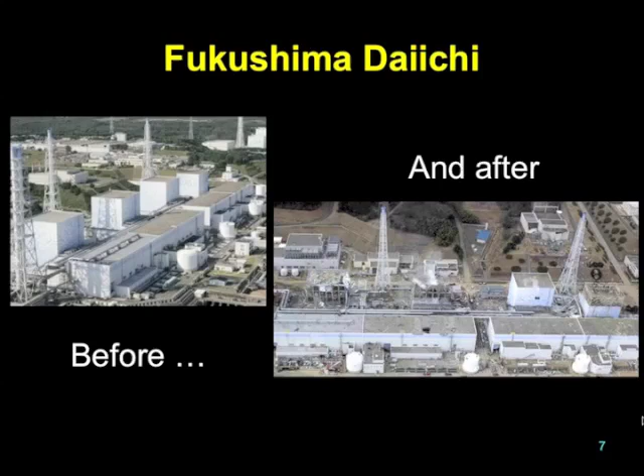Okay, Fukushima on March 11th, 2011 was a 6-reactor nuclear power plant. 3 of the reactors, units 1, 2, and 3, were operating. Units 4, 5, and 6 were shut down for scheduled refueling and maintenance outages on that day. The picture on the left shows the plant site before the accident. The picture on the right shows the plant after most of the damage had been done.

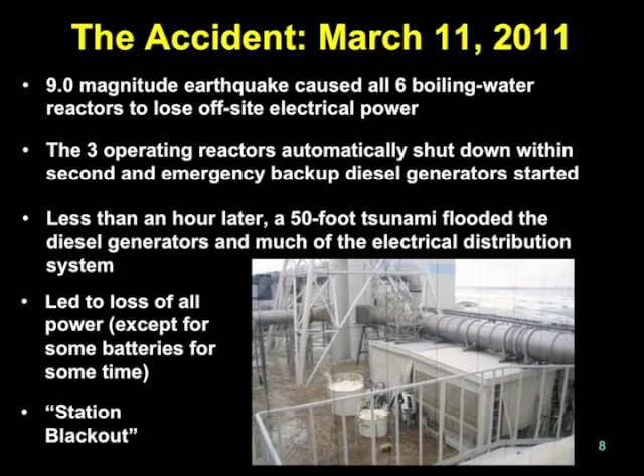That condition where all alternating current power was lost and the only thing you had was direct current power from batteries is what's called a station blackout. It had been known for decades that station blackouts are very likely to lead to core damage, and this event followed that script pretty well.

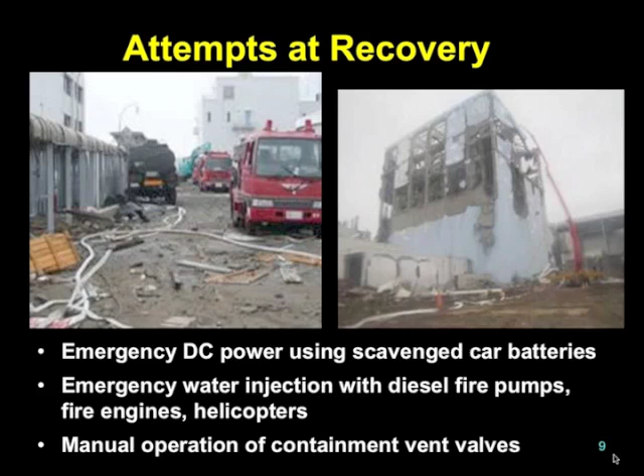The benefit, although that's not why they blew up the buildings, but the benefit of that happening is it provided pathways that helicopters and fire trucks from below were able to use to get water into the spent fuel pools. So as bad as Fukushima was with 3 damaged reactor cores, the openings that resulted from that allowed workers to minimize the damage and prevent the spent fuel in those pools from becoming overheated and adding to the problems that the site faced.

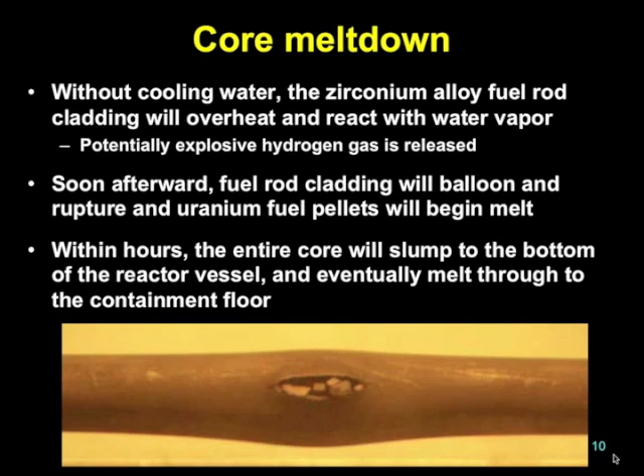The cladding started breaking. Here, at the bottom of the picture, you see what's called a fish mouth crack in a metal fuel rod, and you kind of see the fuel pellets inside. It got much worse at Fukushima. It actually overheated and melted. It became more like lava than fish mouth cracks. And the exact location of those reactor cores is known in general, but not specifically, because workers hadn't been able to get inside the containment buildings to figure out where they wandered off to.

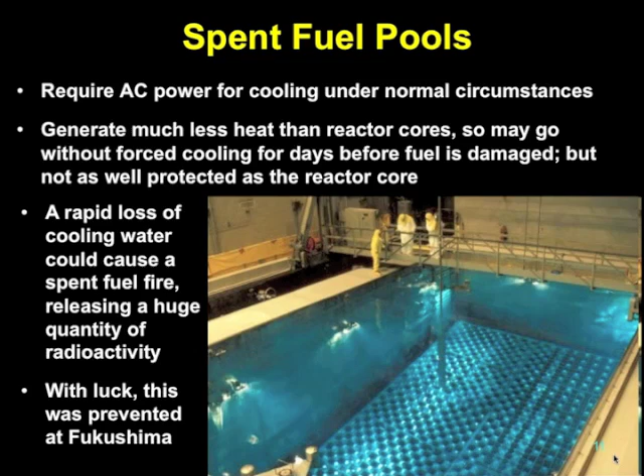So with the end, or the end of the beginning, I guess, because it's going to take quite a while to clean up the mess, they lost 3 reactor cores, melted down. Units 1, 2, and 3 that were operating at the time, they weren't able to adequately cool, and all 3 overheated and melted down. There were 2 spent fuel pools, Unit 3 and Unit 4, that were of primary concern. They were able to prevent significant fuel damage in those pools.

3 hydrogen explosions damaged the Unit 1, Unit 3, and Unit 4 reactor buildings. There was no fuel at all in the Unit 4 reactor core, but Unit 3 and Unit 4 shared a common exhaust line, and it's theorized that hydrogen gas from the damaged Unit 3 core went through that shared line into the Unit 4 reactor building and exploded.

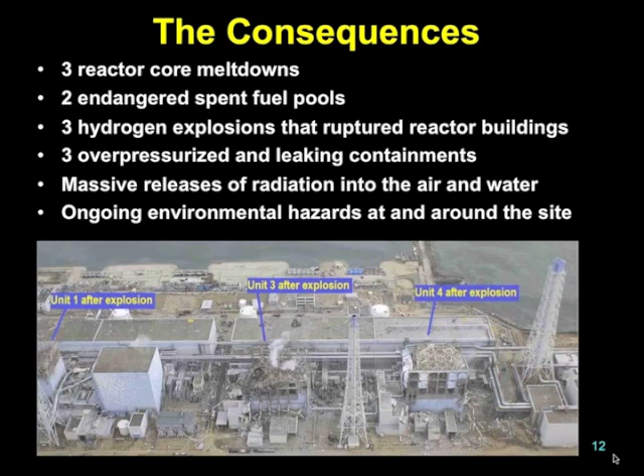The 3 reactor cores released quite a bit of radioactivity, and much of that got into the air and water, which prompted the evacuation and leads to tens of thousands of people today, more than 3 years later, that still can't go home because of the contamination. And it basically left a footprint that's going to take decades and billions of dollars to undo the damage from our cleanup.

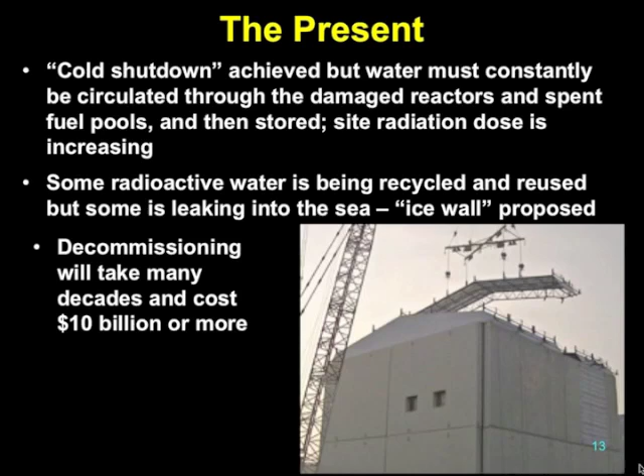In the longer term, meaning over the next few years, they have an ambitious plan to try to freeze the soil around the site and create what's called an ice wall, but that itself has some technical challenges, and it's not clear it's going to work. Decommissioning of the site itself is going to cost more than $10 billion as a current estimate, but that's only a fraction of the total liability that TEPCO is facing.

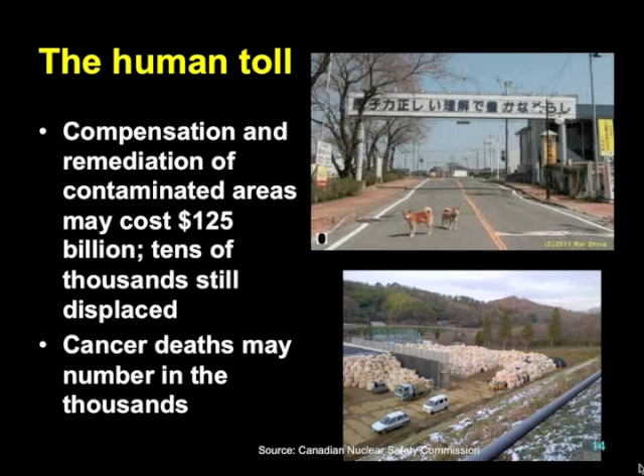Most of the radioactive exposure is probably still in the future. That's going to be people who return to areas where there's more radiation than there used to be, but at levels which the government says are safe. But that is going to have a health toll, and it's going to cause thousands of cancer deaths in the future. We still have the opportunity to prevent some of those, but the way things are going, it doesn't look like it's going to happen.

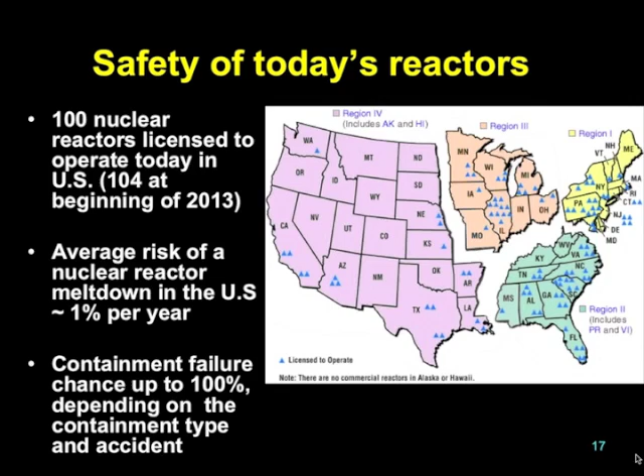And so we do have 100 nuclear reactors still operating in the United States. If you just look at the industry's own numbers, the risk of a Fukushima-type meltdown is about 1% per year, that something like that will happen somewhere in the United States, and the containment could fail depending on the type of plant. If it's an ice condenser and a station blackout, that could be up to 100% chance of failure. So that meltdown would result in a radioactive release with near certainty. Next slide, please.

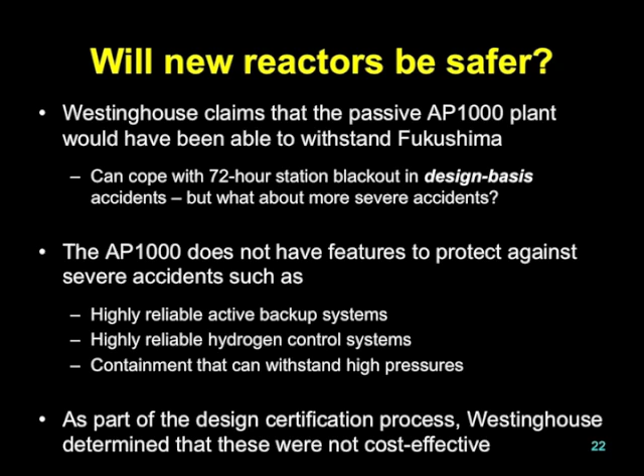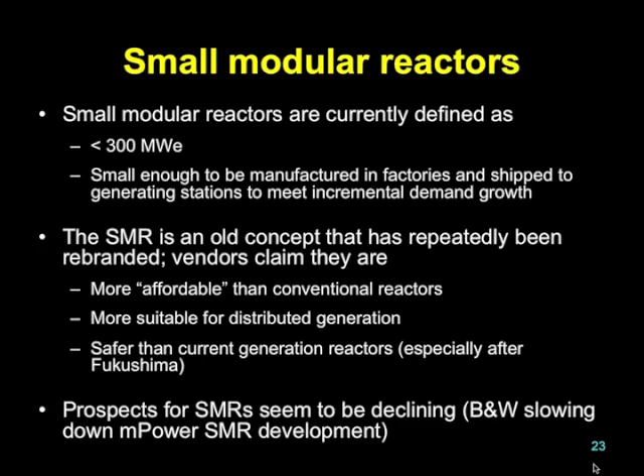I came to this project as the storyteller. I'm a journalist, as you were told, and I saw this as a technological disaster, but one with a very human face. And I think we're seeing more and more of the human side of what the long-term consequences are. About 40% of all Americans live within 50 miles of a nuclear plant. That amounts to about 120 million people. That fact alone should answer the question, why should we care about nuclear safety?

Nuclear safety has long been debated in hypothetical terms, but what we saw on our television screens and in web videos was an accident that was playing out in real time. And I think the world saw exactly what could happen, and that this very carefully crafted myth of safety unraveled before their eyes. We just watched transfixed as events just kept worsening and worsening.